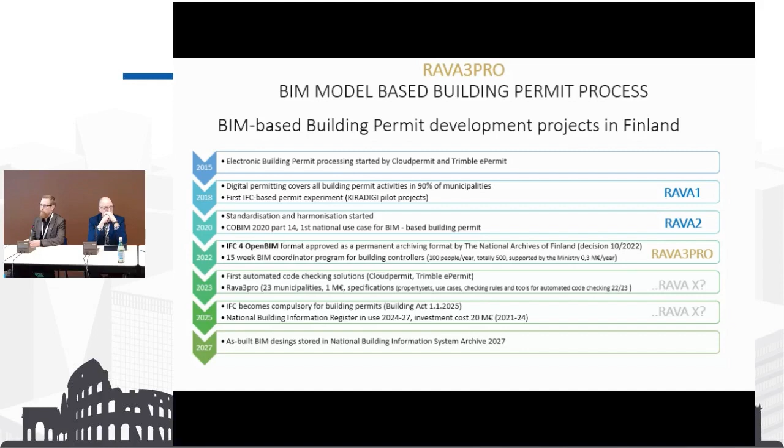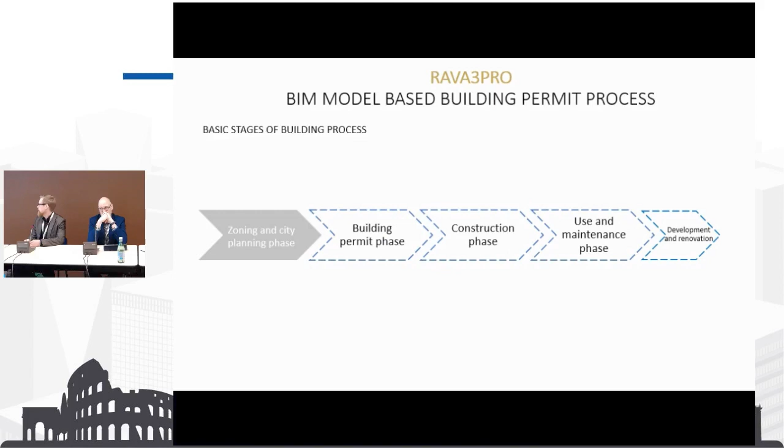So let me tell you a bit about our stages in the building controlling process. Here's the basic concept: we have zoning, then after that comes the building permit phase, construction, use and maintenance phase, and then of course development and maybe renovation.

What do we do in building control? Of course, it's customer service and guiding in different issues, and handling building permit applications, including city space and illumination advertisements all around the city.

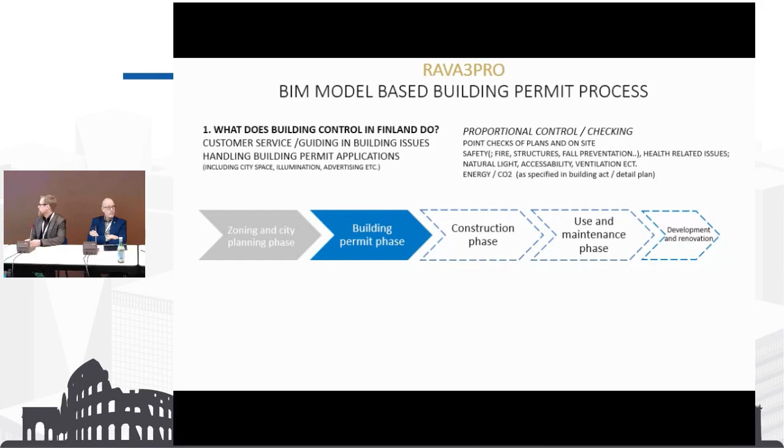Our work is proportional control and checking. We don't go into the plans in depth, we just do the most important point checks on plans, and then on the construction phase on site. These issues are like safety, fire, structures, fall prevention, etc., and health-related issues, natural light in rooms, accessibility, ventilation, etc. And of course CO2 is becoming an important issue.

So these are views from our main permit systems. Everything is filled in digitally, and you can actually already submit an IFC model, and we can manually go into it and check different issues.

The things that clients fill in are the essential basic information, like estate ownership and legal information concerning the application.

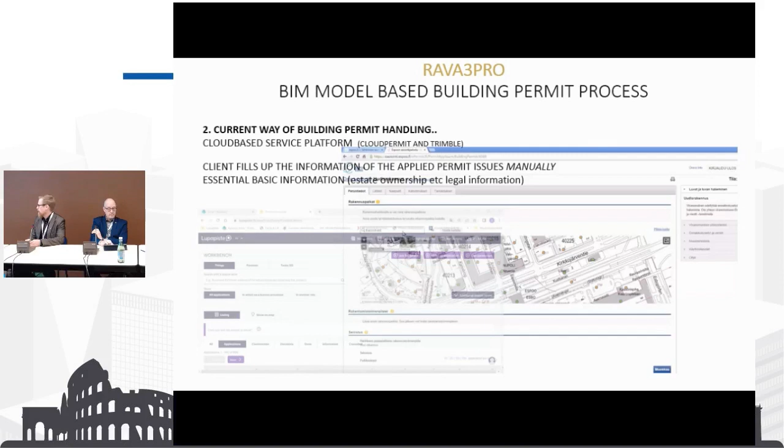In more detail, these stages of customer contact in the e-platform are a query for guiding and information. Basically we want every question put into the system, so it's transparent how we've handled the applications or questions, and we can always come back to it. It will keep an archive of different stages of plans, sketches, and more detailed plans, and so on.

The handling officer will answer the questions and probably ask for more information, and this guiding or questioning can be a path toward applying for the building permit.

Then you can go in and put in the plans, and the project is based in sketch status, when officials can't see it.

The next level is if the customer wants us to see the plans, so they can make it visible to officials without leaving the application yet. So they can ask questions, and we can go into it without going too deep, as it's still at sketch level.

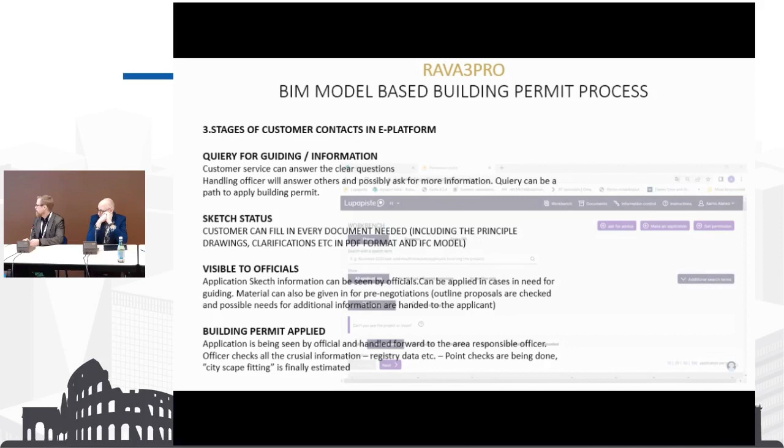System-wise in Helsinki, we have three operating systems. The first is this Cloudpermit Lupapiste platform, and then we need the Fakta platform to make the real decisions, so we need to transfer the data to different systems to make the actual decision.

Fakta is also the municipal registry of information, and is also used for handling the construction phases and different checks within that phase. We also have the Ahjo system, which is used by other city operations and for our permits that go through the building control committee.

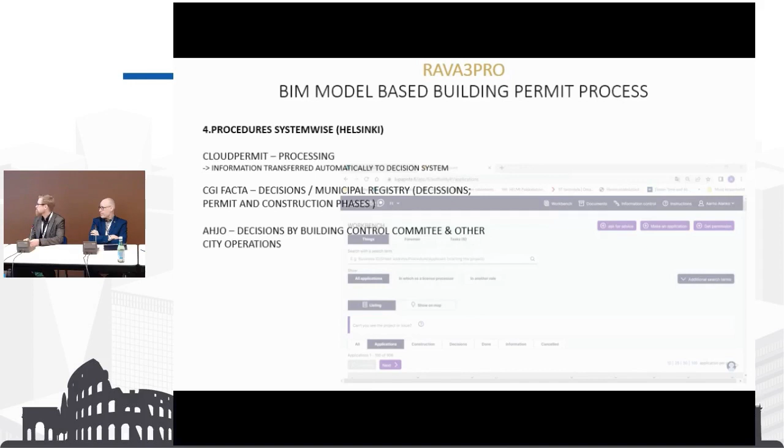Now deeper into the Rava 3 Pro project. Some parts are already done and some are still in the vision stage, and I will tell you more about that in detail.

The basic concept is that the law will demand everything be in machine readable form or IFC model, which the applicant leaves into the service system.

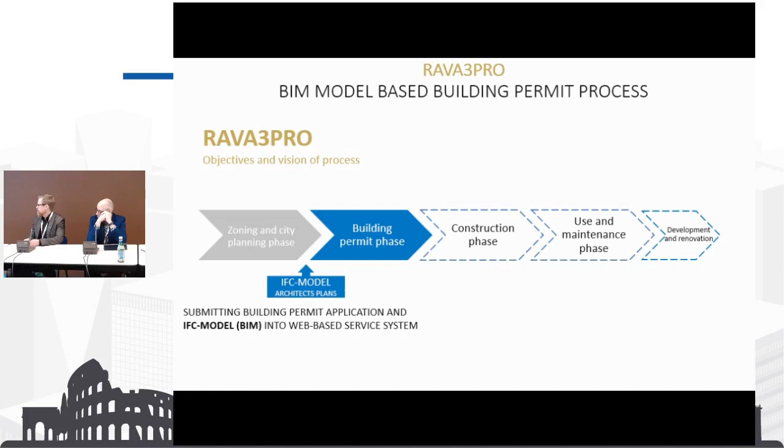Our aim is to have an integrated IFC checker which will operate automatically and check the model, ensuring everything is done properly using property sets and rule sets generated according to the Building Act and also the RYTJ Act, which is the Built Environment Information System Act. And it will be checked.

And the checkpoints are, like I told before, the register data. So it includes address, site codes, and apartment identifications like areas, volumes, features, heating type, if it has balconies, or every data we can collect. And then, of course, the coordinate checking has to be done in the right way so that we can fit it into the city model.

And then the properties of buildings: area, volume, room properties, like window sizes, which has a minimum of 10% in Finland, heights, which also has a minimum level, and construction materials, maybe later on when we have this, where we can have the CO2 counted.

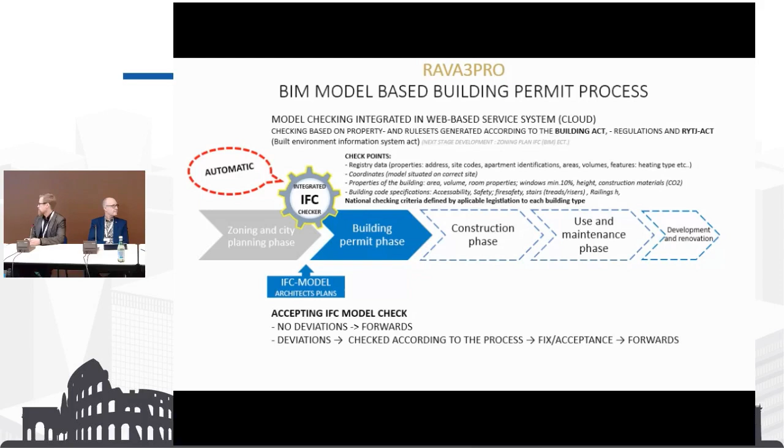And our vision is to have, when the model is accepted, the transmission will be automated also to this built environmental information system as well as the city model. So our vision is that the city model is building up automatically in different phases, and you can distinguish the different phases, and it's going to be transparent also to the citizens.

Is it converted to a CityGML file to be in the city model, or is it as an IFC there? Where we have to repeat, is it converted automatically from IFC to CityGML, something like that? It's not going to be IFC, but we are having other projects doing the transformation.

The goal is to have automated transformation, but we will see. We did some experiments in The Hague with that. So it will be a huge step compared to how it is done nowadays. It demands remodeling to fit the city model, and that's not really clever.

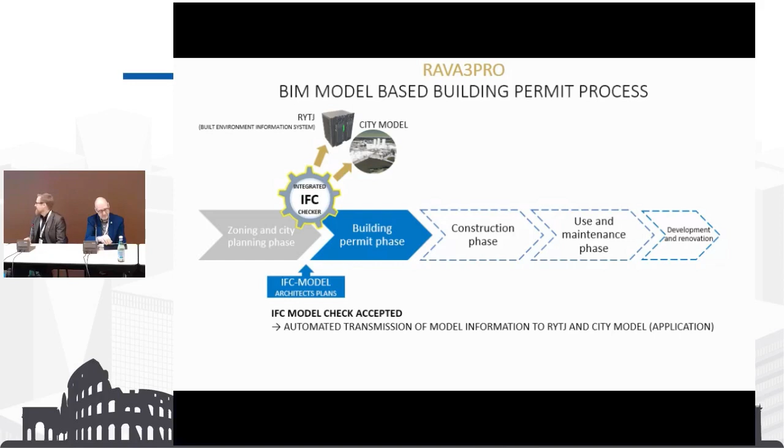But then we come to the permit phase. So other advantages of having the IFC model include the basic work, like evaluating the cityscape, where we have been examining and making the city model more realistic, so it can be used to evaluate the cityscape.

And we have had projects enriching the city model with drone image material, and we have also run tests on different operating systems or platforms, and it looks really promising. And as IFC is also having surface textures in the IFC4 format, it will be even better, and the manual work will be lesser and lesser.

And of course, it's more transparent, and it's enhancing the interaction also with the neighbors, for example, and also the citizens, who can see the developments being made in the city model in real time when it is automated.

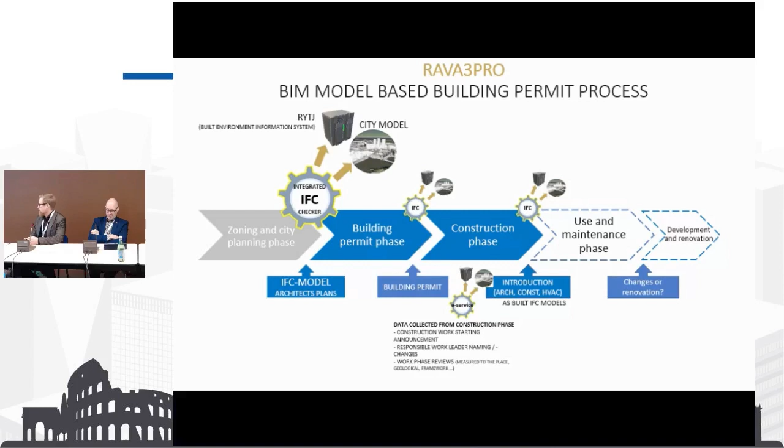And then the next stage will be introduction to use. At that point, the new law will demand not only the architectural plans, but also construction or structure plans and HVAC plans in machine readable or IFC models. And also there we have the checks similar to what's done for the architectural model, also forwarded to the built environmental information system and city model.

So for all these three models, the property sets, entities and use cases are being defined.

And then the final stage is when the building is taken into use, maybe with changes or renovation that was taken away from the law, but we still see that it could be part of the law or operations, so that the buildings will stay and the model will be staying updated in the built environment information system. Probably those will be changes which don't demand the building permit. And within this new law, the border of the building permit is to be raised, so there will be more and more information which will be under the building permit.

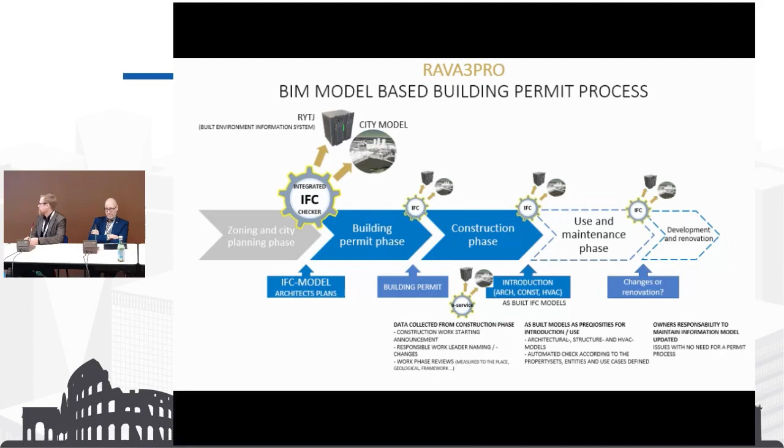So this is our project plan from left to right. First we are going through the requirements we need in building controls, and by that the checking rules, and then we go through the use cases and do the process development and piloting. We will pilot every use case we have set, so it will work when the system comes into use. And then, not the least, the BIM maturity level in building controls. We are educating all the time, and probably we will get more funding to educate our officials in BIM.

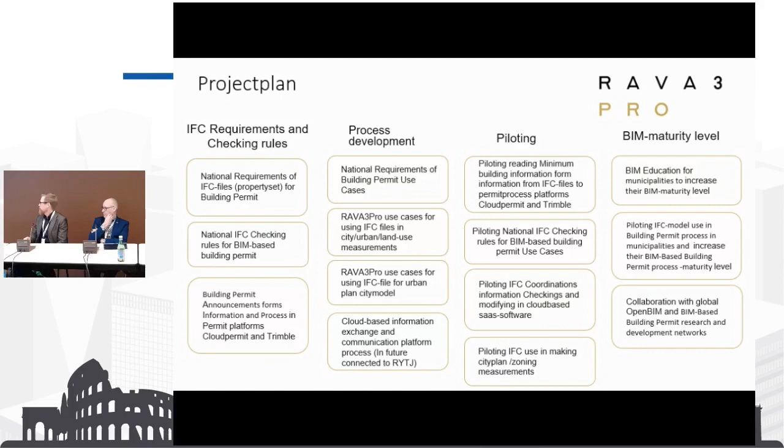Congratulations on this big achievement.

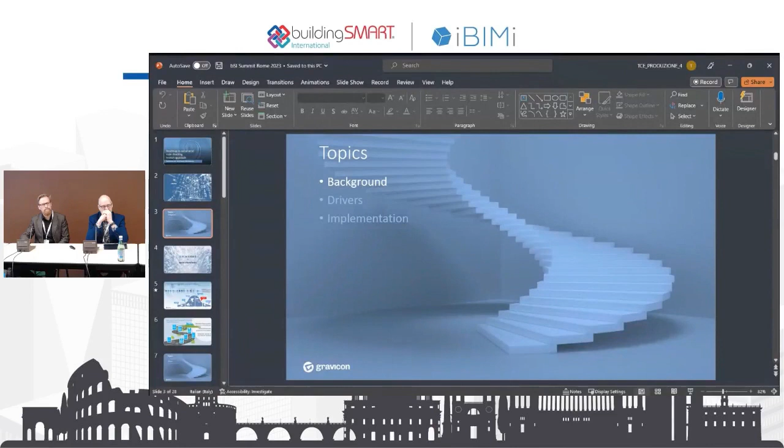First of all, I have a question about the checking of the building permits. Is it meant to be only an internal checking, or do you also provide checking for the companies who would like to reach out to deliver the building permits to you? Can you say something about that?

Yeah, the main idea is that the building control won't check anything. The designers will check. They know our rule sets, so they can check it themselves. We hope it will get a green light in the automated checking, and if not, we see the points why not, and then we can discuss them and maybe grant the building permission.

Thank you. I asked this question yesterday in the regulatory commission requirements room, and I'll ask it again. This implies a sort of shift in practice. I mean, the technology's there, and I think it's great, but with reconfiguring the permitting process, how is that being rethought in light of this project? Two more specific questions: is this going to get the authorities having jurisdiction involved earlier? I mean, that's something we hear a lot - they like to be involved at the beginning, having better, more progressive access to the project. And the second thing is around authentication, digital signatures and responsibilities - how is that being managed through the project?

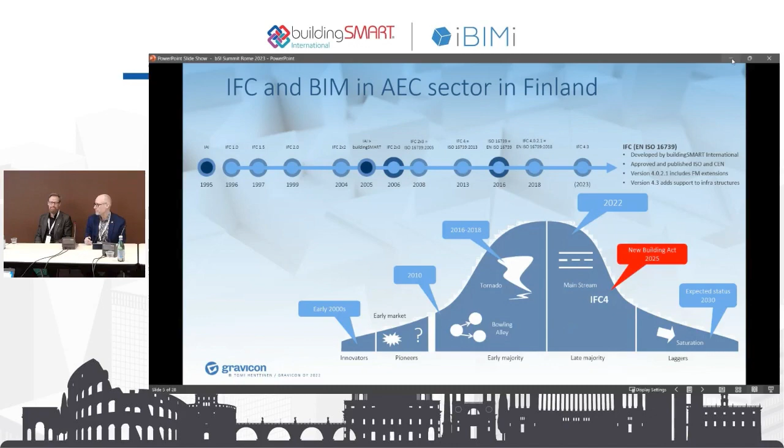Now the new Building Act will be activated in 2025, and we have IFC 4 as our baseline. I expect that by 2030, IFC or BIM - let's say BIM is dead. By that I mean nobody is actually making a big deal about BIM, it's just a normal way to do it. Most of you have used CAD systems - how often do you say 'I'm using CAD'? You don't, it's just the normal way to work. There's a long transition here.

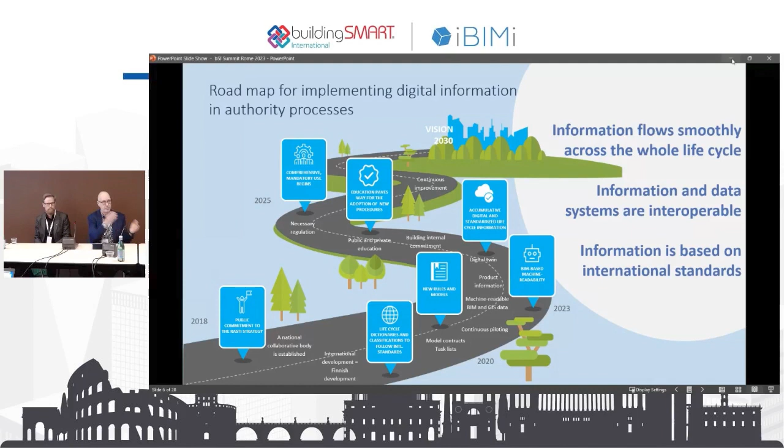But I think this roadmap was - also when we come to terms and definitions, in Finland we have a long history of developing our own things, including terms and definitions. Now when we talk about interoperability, the first question is almost always: how does this relate to international standards?

Okay, then some drivers. One, of course, this is the big driver here - why do we digitize things? We need to calculate what is our climate impact, and this is of course not just a Finnish thing. This is a global thing.

How to calculate CO2? In the European Union, we have directives, we have regulations that require us to do this. We need to have our materials aligned with the databases. So we have these environmental drivers, and the regulations are the way to control that these goals are achieved.

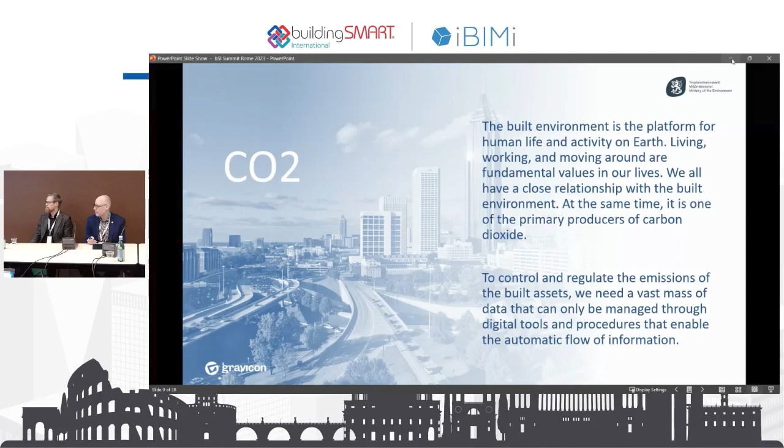Then one of the drivers is data. The amount of data is growing all the time. There's just a lot of new data coming in, and how do we handle that? The answer is we need to standardize. We need to harmonize both the data, but also the processes of how we handle that.

Then an obvious issue is resources. The building permit authorities are constantly suffering a lack of resources. There is not enough qualified people. So that's a hard fact - like Aarno was telling, we need to automate things in order to free some resources for other tasks, the essential tasks that building permit authorities and building controllers are doing.

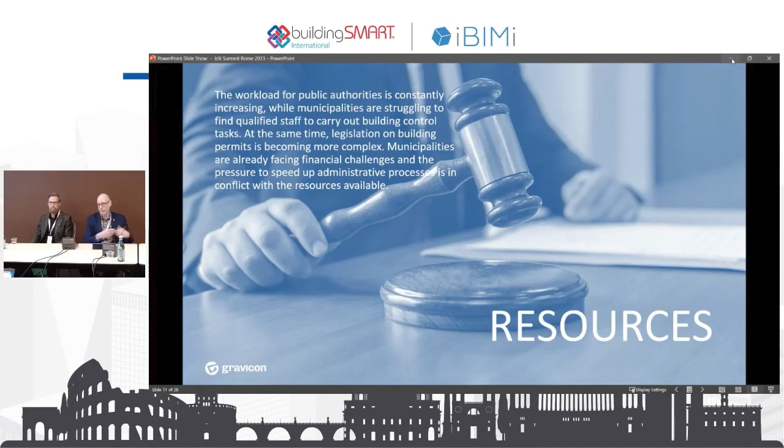And then there is also a European Interoperability Framework requirement. In the EU, we have a requirement that all data should be interoperable. This EIF is an initiative put together by the EU. That's why the whole governmental sector, not only the built environment but the whole governmental sector in Finland, has been building up this interoperability framework and platform. We are publishing terms and definitions, our data models, our codes - everything is published on this platform. Some of the terms and data models are also translated to English.

Okay, those are the kind of background. Then how did we do it - implementation. Of course, we have the big picture, the vision and the objectives, already mentioned several times: our automated regulatory processes are moving from the traditional workflow towards the BIM-based workflow.

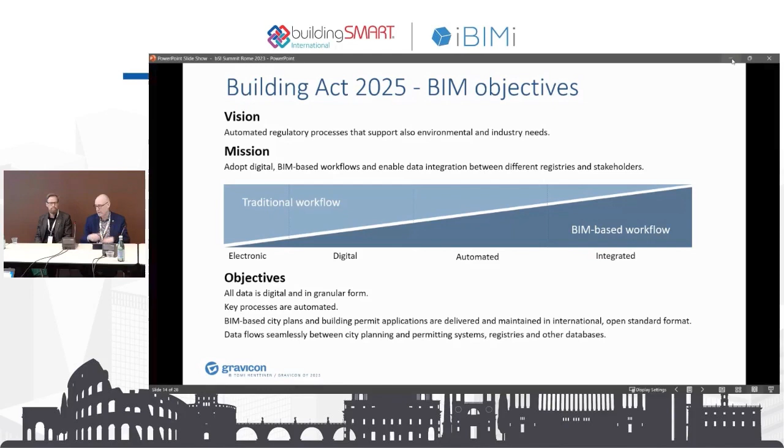Of course, it's probably in electronic form, so it's not like typing in the data manually. But by manually, I mean you have to make a data dump. You need to export a CSV file or something like that, and then import it to another system. Of course, the data is not up to date, and many times the same piece of data is different across these different systems. So how to integrate these different registries and systems, that's one of the goals.

Like Aarno told, we are already using digital permitting. So very basically the starting point is we have good penetration there. I think 98 or 99% of all building permits in Finland are already done

using digital documents, PDFs basically, and digital web-based platforms. The next step would be digital models, the IFC coming in. Then, moving forward, automated checks, and also the automated flow of data between different systems and registries. And then the final goal is to integrate processes with industry processes.

Because, for example, on the construction side, inspections are done. They check how much air there is in a certain room, what is the sound insulation between two apartments, and so on. These on-site inspections happen during construction. Now, building control is basically doing similar inspections, and one of the goals is that we actually integrate these so that you do it just once, and that can be reused by different parties.

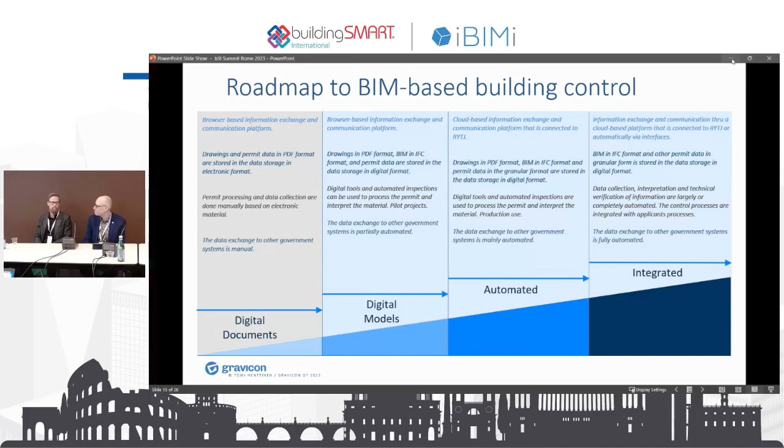The same diagram that Aarno was showing earlier. What I wanted to explain here is that all this costs money, we need funding for this. So the government has set up a project called Ryhti, which is still running, with a budget of 20 million euros.

It includes the interoperability work. It includes the technical work for the legislation. It also includes some parts of the work that municipalities are doing, even though you are getting a little bit of extra funding from the Ministry of Finance. But I think the biggest money goes to what we are developing now

the ministry is funding development of a national registry for the built environment, based on data models such as IFC, but also others. It's a place where you collect all kinds of decisions, information about processes, building permitting, and so it's not just model data that's put there. I think it's mostly something else than models.

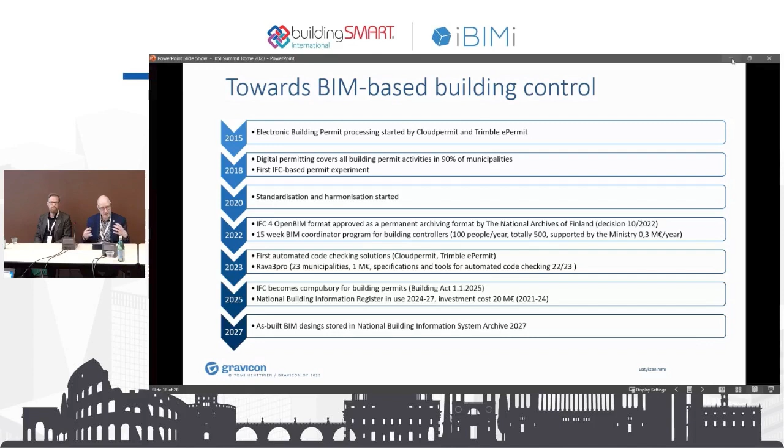But anyway, the timeline is that the first electronic building permit platform started in 2015. By 2025 we have new legislation activated, and then there's a certain period, and by 2027 this national building information system, the registry, should be fully operational.

There are several actors in this, as mentioned many times. We have the Ministry of the Environment, who is responsible for the legislation. They are also responsible for the registry for built assets, which I explained, and they are also responsible for the digital interoperability of the built environment.

Then we have municipalities, and what Aarno was explaining, all the requirements for building control, doing the building control. And then, from the IFC point of view, they are also responsible for the short-term storage of digital assets, such as IFC models.

Then we have the National Archives, which sets the rules for digital archives, and they are responsible for long-term archiving of digital assets, as well as non-digital, but nowadays basically everything needs to be in digital form. And then, of course, last but not least, the industry. Industry plays an important role because the industry is actually producing the information.

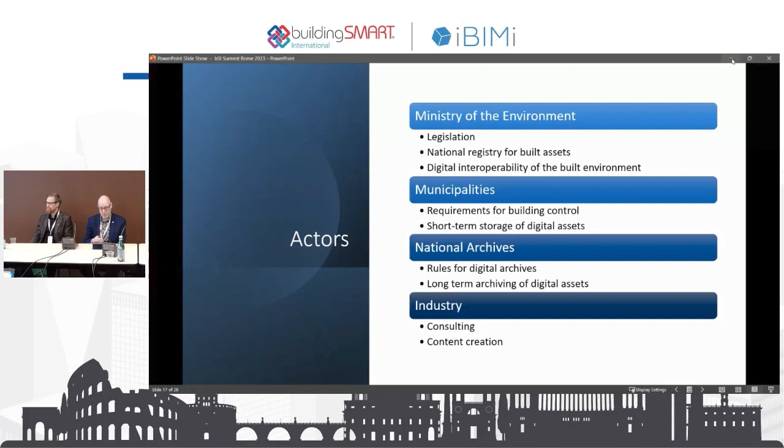I've been asked many times, when we published that the IFC will be a mandatory format in Finland for building permits, and not only for building permits but also for as-built models, and this is something which is okay, I'll come back to that. But yeah, I've been asked: where can I find the information? Where is the regulation for that? And the answer is nowhere.

And I will explain how this works. So we have the Building Act. That's the legislation for the whole built environment, basically.

In the Building Act, it says that the project shall deliver to the control authority a three-dimensional model, a data model, in machine-readable form for the building permit, and at the end of the project as an as-built model.

So it can be also something else than IFC? Yes, but yeah, it could, but no.

Then we have the Act on Public Administration Data Management. This is another piece of legislation which specifies that all data managed by a public authority has to be archived, both short-term and long-term archiving.

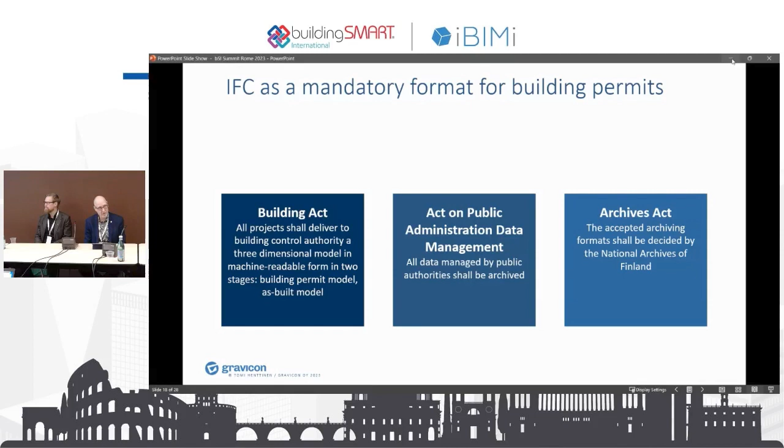Then we have the Archives Act, which specifies who is the authority that controls the forms, the formats. And in the Archives Act, it says that the National Archives of Finland is the authority that declares the official archiving formats.

And finally, we have the National Archives, which made a decision in October that IFC 4.0.2.1 is an official archive format. So these things.

So when you put these parts of the puzzle together, it means that IFC 4.0.2.1 is the official format for building permits, because the municipalities only accept formats that they can archive, because they need to archive everything. So it's a bit complicated thing.

But the beauty of this thing is that it gives us a little bit of flexibility, because as you know, changing laws is always tedious work, and it's a political thing. Changing the Building Act took 5 years. Well, maybe the secondary legislation is a bit easier, but still it's a political thing.

But now when IFC 4.3 comes out, hopefully later this year, as an official ISO format, then we can go back to the National Archives and say, okay, now the ISO has accepted IFC 4.3 as an official format. Can you please declare that as an archiving format as well?

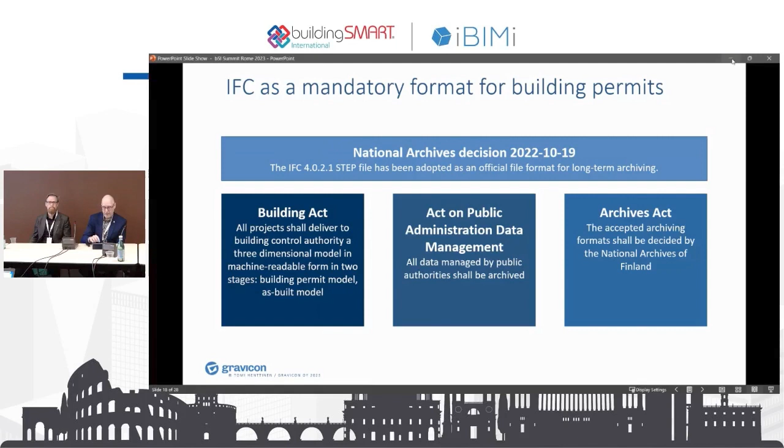Then we have, because the Building Act is kind of umbrella legislation. And like I said, it just says that you have to provide the model in three-dimensional, the model format should be a three-dimensional data model in machine-readable form. So it's really kind of overall vague.

But then we have secondary legislation, which is kind of a supplement to the actual Building Act, which specifies a bit in more detail what is needed.

So at the moment, the ministry is working with the secondary legislation for the design models and for as-built models, specifying in more detail, let's say, a legislation saying what kind of drawings are needed for building permits, basically what needs to be presented in the drawings. So now we are doing the same for BIM models.

The thing which is really interesting is the as-built models, because so far today the building control only takes in the building permit material, so PDFs, basically drawings today, and IFC in the future. But the new Building Act says that starting from 2025, you need to also deliver the as-built model.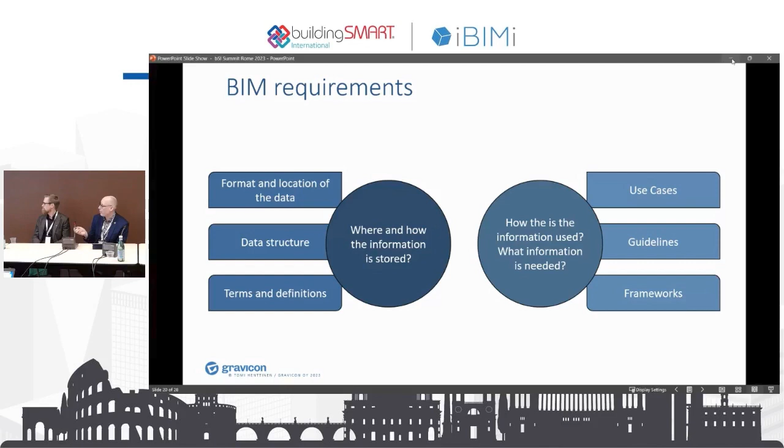For how the information is used and what information is needed, we have frameworks, guidelines, and use cases. For use cases I could talk the whole day, but I'll just touch on that subject briefly a bit later. Of course, all of this is coming from standards.

For terms and definitions we have the ISO standards, and national vocabularies as well. For data structure we have, of course, IFC - that's the only game in the downtown. And for the location, we are using property sets, IFC standard property sets, but also utilizing technologies such as bSDD and IDS to specify these things.

And then for the process part, we have ISO 19650 - that's the mother of all BIM standards. And then ISO 7817, the level of information need - actually it's not there yet because it's under development, but it's an existing European standard 17412 part 1. Then ISO 12911 is a guidance standard for building up BIM guidance and guideline documents. And we have ISO 29481, which is the IDM standard - a few words about this later on.

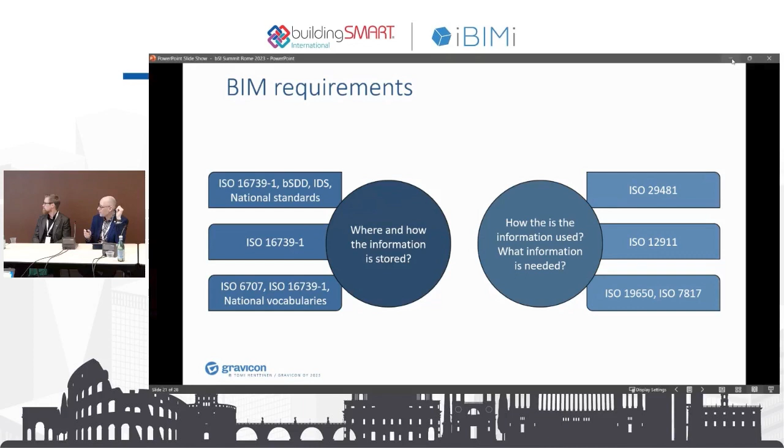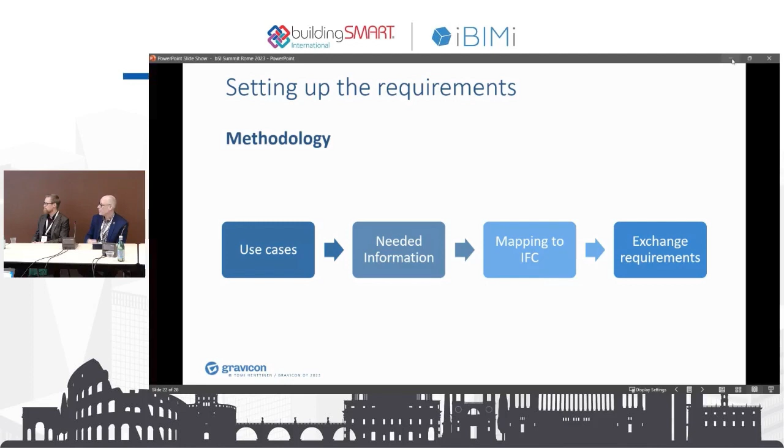Then the methodology. Basically the methodology here is based on IDM, so we are using the IDM concept or method to describe these things. We start with our use cases, defining the purposes, how we are using the data, what kind of data is needed. From the use cases we come up with the needed information, then we map that to IFC, and after that we can create the exchange requirements.

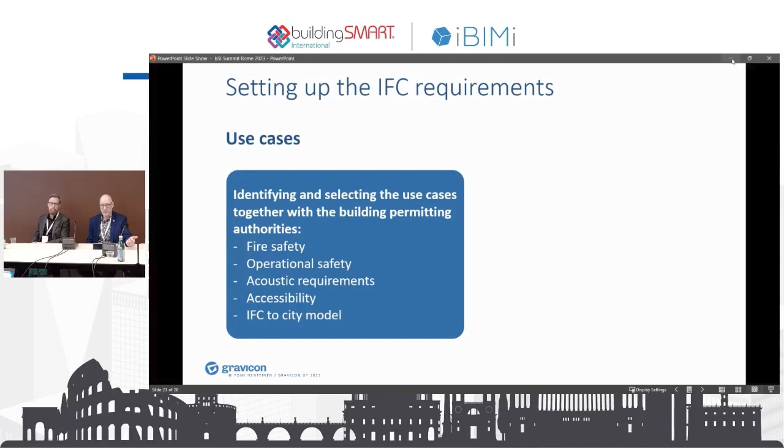For the use cases, we have now selected, together with building permit authorities in this project that Aarno was explaining earlier, 4+1 use cases: fire safety, operational safety, acoustical requirements, and accessibility as the 4 use cases, and then IFC to city model as the +1 - that's a little bit different use case, but nevertheless a use case it is.

The information about the information - we have studied the legislation, especially the secondary legislation, which has more detailed information, for example fire regulations or sound insulation regulations. We have walked through these secondary legislations clause by clause, finding out how it could be turned into machine readable form, or a form that the machine understands.

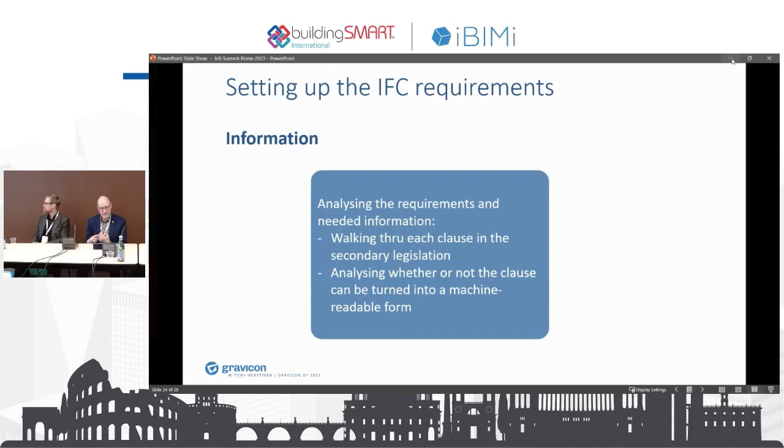Many times it's impossible, and the problem is, of course - Nick, you can come back to this - the problem and challenge is that they include lots of exclusions and exceptions, which make things really hard. And then analyzing how IFC can support this.

To some extent, it can do that quite well. For example, for the architectural model - in Finland, the building permit is always done only using the architectural designs, and MEP and structural designs are supplementary, which means the building control authority is not actually approving them. You're just kind of saying, we want to see them, if they look good, you can start building. But basically, the building permit is given using the architectural designs.

Infrastructure is excluded. We are only talking about buildings.

But does the architect also model the structural design? No, in Finland it's a specified domain - it's a structural engineer's job. So if you only check the architectural model, you don't see the construction model, right? No, we see the constructional plans, we get them in, but we don't accept them. So the responsibility is on the constructional engineer. You take the responsibility for the architectural then over? No, the responsibility is always on the designers.

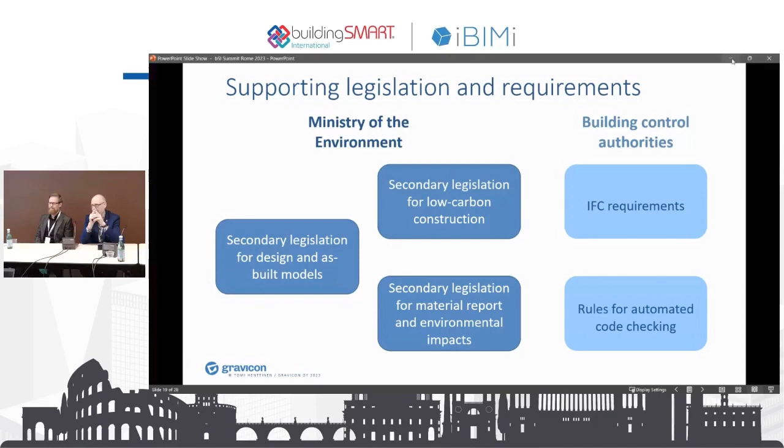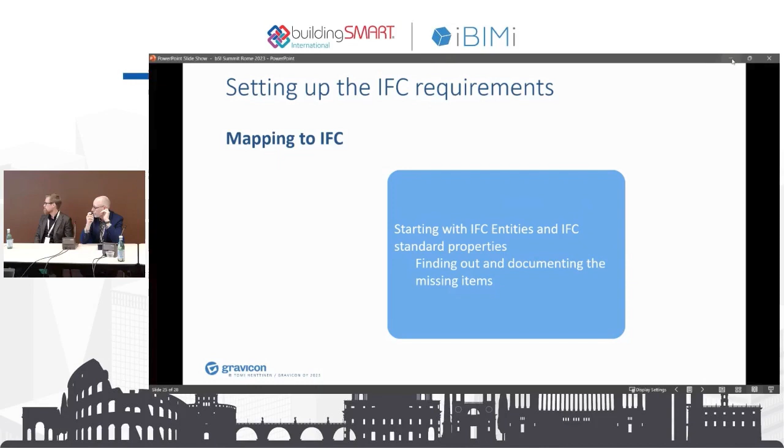Okay, just to wrap it up, my final thing: from when we have been analyzing the IFC and the needed information and the needed checks that we need to do, then finally we need to do the hard work, which is to specify the geometry properties and the harmonized data contents, and also document and record all of this. That will be a lot of work, but it's already under development, so it should be done.

A lot of paper. Okay, to summarize, the goals for this are that we have everything in digital format, the content of the IFC and data models in general are harmonized, and the processes are both automated and later on also integrated. So thanks, that's for me.

But we can continue with the questions. Nick. Hi. I'm not allowed to say things in the regulatory room because I'm meant to lead it.

But in this room, I'd like to mention ISO 12911, probably the ISO standard you haven't heard of before. What it does is give a method for capturing rules and requirements systematically, and you can then convert that to any rule system you want to use. In the UK we had a project called DCOM, Digital Compliance, and in 3 months we digitized and automated the English and Welsh building regulations, with fewer than 100 lines of computer code needed to do it.